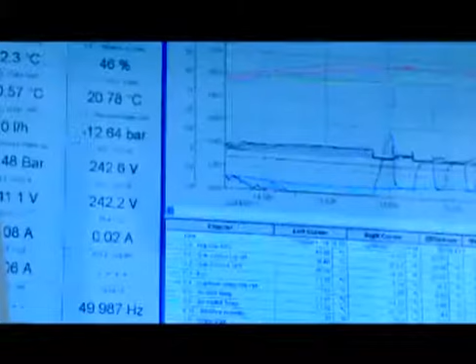We are innovating across the spectrum of renewable energy solutions, from ground and air source heat pumps to solar, photovoltaic and solar thermal, from smart RADs and smart energy management systems to mechanical ventilation and heat recovery units. All vital elements of our low-carbon future.

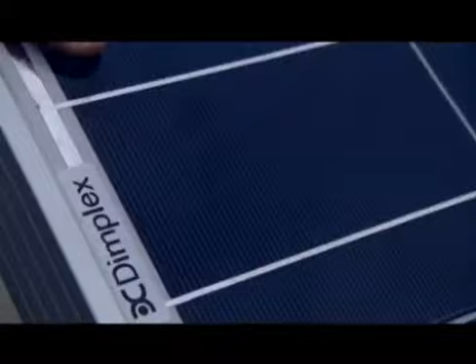Our local star, the sun, gives out 8,000 times more energy than the entire planet needs. Glen Dimplex has established itself a clear world leader in tapping into this sustainable energy resource with maximum efficiency. Our ground source heat pumps draw out the warmth stored in the earth, and our air source heat pumps extract heat from the air, even in sub-zero temperatures.

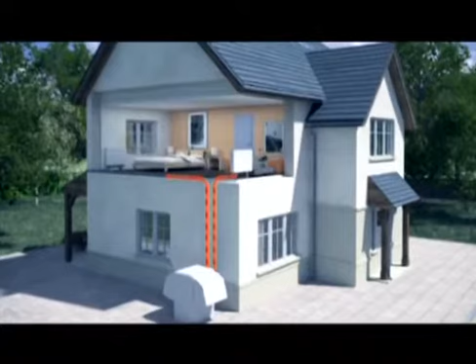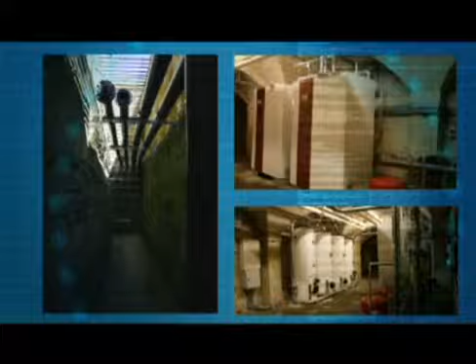We've been manufacturing heat pumps for 30 years, and our technology can be retrofitted into existing buildings or be part of any ground-up new development, providing all the heating, hot water and even cooling requirements without compromise.

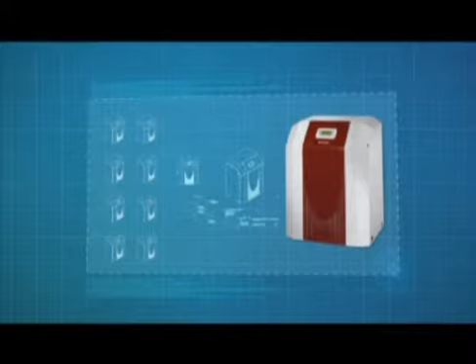Glen Dimplex is a European market leader in heat pumps with capacity to deliver more than 50,000 units per annum. They don't just make environmental sense, they make compelling business sense too, reducing energy costs by as much as 70%. In fact, replacing all fossil fuel heating systems with heat pump technology would reduce global building energy needs by three quarters.

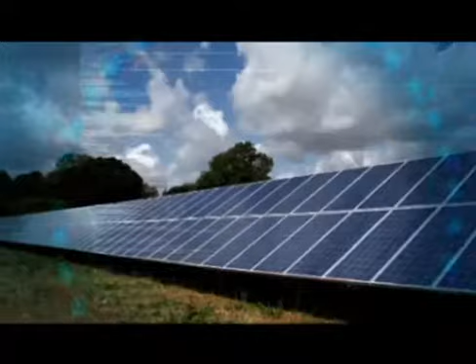Glen Dimplex is a trailblazer in much more than heat pumps. We are innovators in solar photovoltaic energy production too. Solar PV is completely scalable, with the potential to generate zero-carbon electricity for domestic and commercial use. Up to half a building's power can come from solar PV, future-proofing you against rising energy costs, and there's little or no upkeep, with no moving parts.

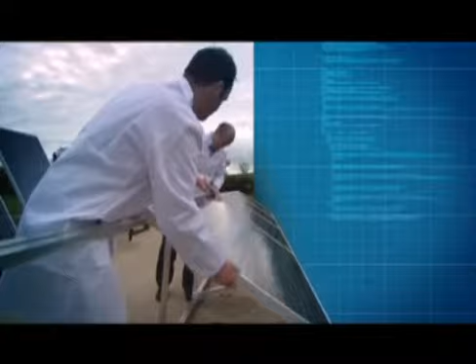Glen Dimplex is also pushing the boundaries forward in solar thermal, one of the most cost-effective renewable energy systems for domestic, industrial or commercial water heating. Our solar collectors bring together efficiency, easy installation and long service life and can produce 70% of a building's hot water needs.

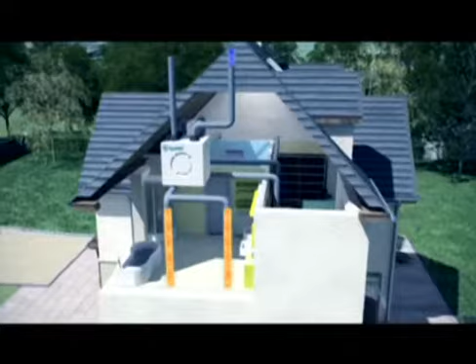Xpelair, a world leader in ventilation systems, is an important part of the Glen Dimplex family. Mechanical ventilation and heat recovery systems make use of the excess heat in buildings of every size, warming in winter, cooling in summer, to increase energy efficiency and cut running costs.

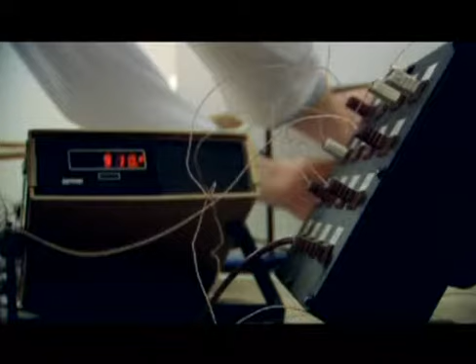This relentless innovation isn't simply confined to harvesting sustainable energy sources. We focus on maximum efficiency in using that energy for both heating and cooling. Take our SmartRad next generation fan convector, the perfect complement to heat pump technology. Smaller, slimmer and operating at a much lower temperature than conventional radiators, SmartRad uses only 5% of the water of a conventional rad, yet warms up a room twice as quickly. That's smart.

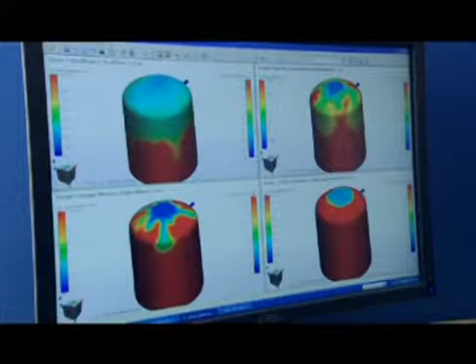Glen Dimplex SmartRads are just one part of our holistic approach, where we design totally integrated, low-carbon, cost-saving systems. We have developed alliances with like-minded pioneers across the world, for example our partnership with GE in designing new energy management systems to integrate with their smart metering. This is key to the development of the smart grid, where transmission, distribution, and consumption of energy are all managed together.

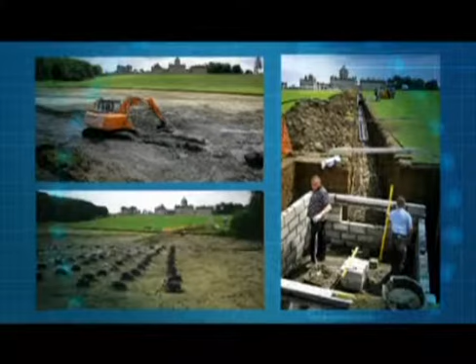So let's see how our sustainable energy solutions work in practice. At Castle Howard in York, England, one of the UK's grandest great houses, a Dimplex ground source heat pump system has been installed. Energy usage has been halved and carbon emissions cut by 60%. There have also been savings in maintenance costs going forward, with this gorgeous building now enjoying a more stable environment for its fine art and furniture.

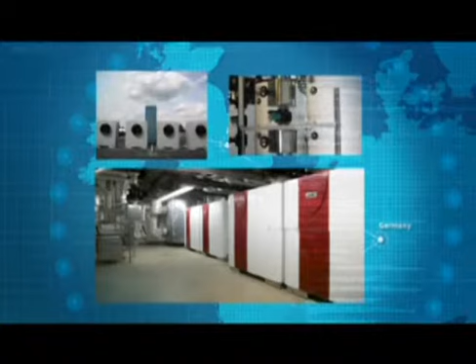Multinational fashion retailer S. Oliver specified Glen Dimplex heat pumps when redeveloping their headquarters in Germany. Our state-of-the-art technology is able to provide all their heating requirements for the 300 people working there, saving 110,000 litres of oil per year on top of the positive decarbonizing impact.

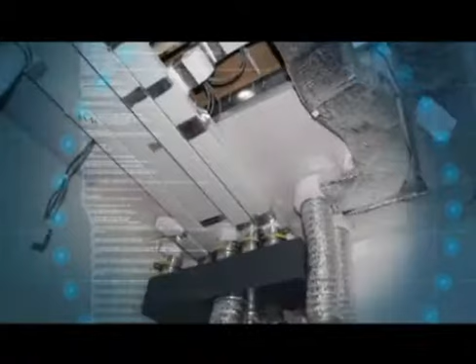Expelair have provided advanced MVHR technology for the Lancasters, a Grade 2 listed heritage property overlooking London's Hyde Park, which is being transformed into prime residential living. Our Expelair systems here will minimize energy loss and, of course, reduce carbon emissions.

Siberia has a reputation as one of the most extreme environments on the planet, with a temperature range from -50 to +40 degrees Celsius. So when this charming church was being sensitively renovated in Romanovo, they trusted Glen Dimplex ground source heat pumps for guaranteed efficiency and toughness in adversity.

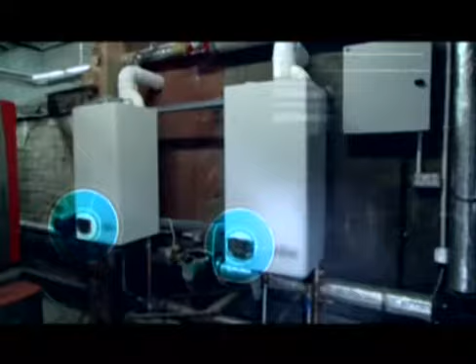At Castlewellan Castle Conference Centre in Northern Ireland, 96 of our SmartRads were retrofitted to deliver heat from a wood-fired boiler. Running costs are reduced, as is the carbon footprint, thanks to their rapid heating times and controllability.

Sleep Farm in Dorset, on the UK's south coast, showcases Glen Dimplex's scope of excellence. Here, our photovoltaic panels are being used in one of England's largest commercial PV farms. This massive 300 kilowatt installation demanded the high output and high quality that Dimplex solar technology assures.

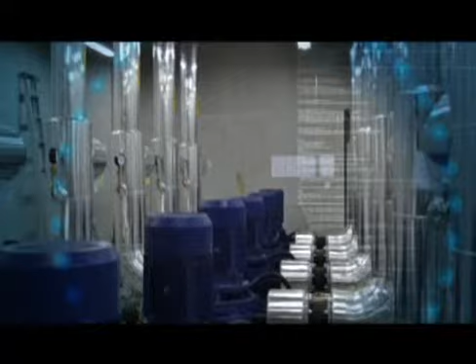An entirely different challenge was undertaken at the Da Ning Theatre in high-tech Shanghai. With a ground floor area of over 10,000 square meters, an array of our ground source heat pumps were installed to feed 2 sets of 5-ton hot water tanks. The low-carbon solution was the perfect future-proofing for this impressive public space.

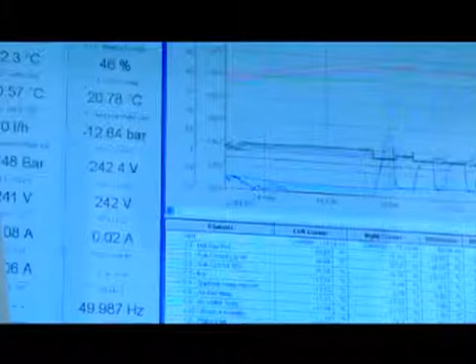We are not standing still. Glen Dimplex keeps a continuous focus on research and development to build more intelligent, more efficient, more cost-effective, sustainable, renewable energy solutions. At our Dunleer Research Labs in Ireland, we have a world-class innovation centre, which is setting the agenda for low-carbon technology. And we have partnerships and alliances with key energy players and innovators right across the planet, from Switzerland to China, Ireland to the USA, including SSE, GE, BYD, EDF, E.ON, Siemens, and Panasonic.

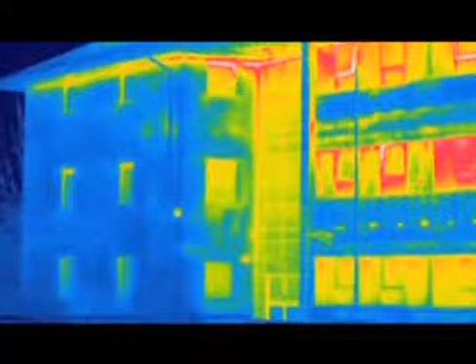Energy is a common currency. It's a language that transcends borders. We are all living off the same finite resources, facing the same global warming issues. It's all our children who will benefit from our inventiveness and our commitment now. With 40% of all energy requirements coming from buildings, integrating renewable energy into building design is paramount.

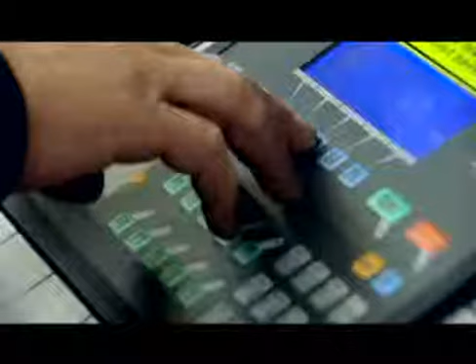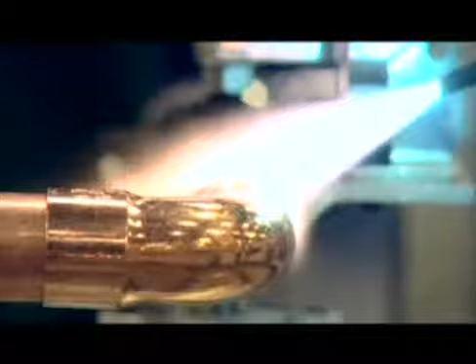It's where Glen Dimplex is a global low-carbon champion. And here's the bonus: adopting sustainable energy systems in our homes and offices, our public spaces and workplaces doesn't just make environmental sense. It's the most economically forward-looking too, saving on fuel, saving on maintenance, saving on parts. Diminishing resources could mean rising energy costs for all of us, but not in a Glen Dimplex world. We can rewrite the rule book.